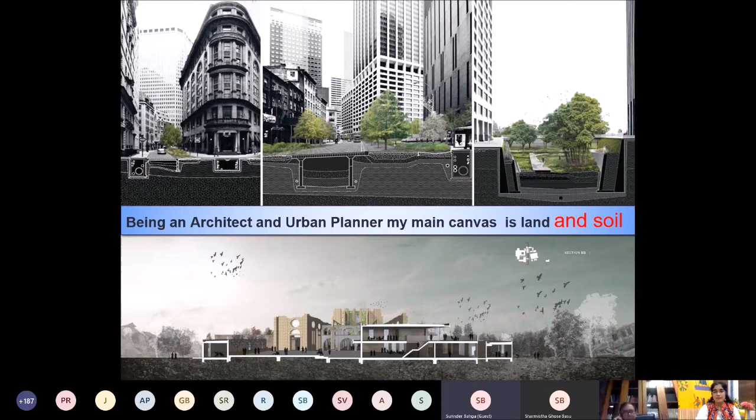But let us go something further from it. As of now, every architect and every owner who has a house on this earth has already affected the starting 10 to 20 meters of the subsurface, that is the ground.

Maybe it is having 2 layers, 3 layers, 4 layers, and there is life below the ground. The water is flowing, there are caterpillars, there are houses of many animals which live below the ground, and your foundations are continuously going below and below.

If you see Burj Khalifa or any other building, the foundations have reached up to a greater depth, affecting the life below. So once you affect the life below, the life above is naturally going to change, because there is a Newton's law.

Every action has a... you can complete the answer in your mind. So we have already affected this 10 to 20 meters of layer throughout the earth, wherever land is available.

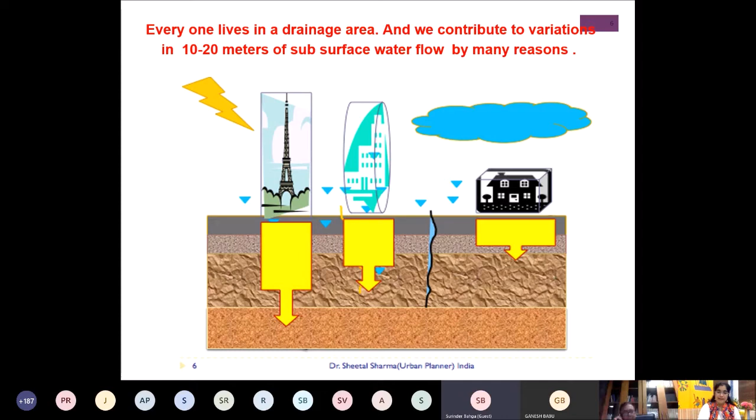There are 4 to 5 types of soil, you must be knowing it. Alluvial soil has a water carrying capacity of 70 to 80%, but under certain circumstances.

I can give you an example: you can be saved from COVID-19 if you have a good immunity system, but a person more than 75 years of age may not survive as much as a 25 year old is expected to survive from COVID-19. Same with alluvial soil, it has 70 to 80% capacity under certain conditions.

Sandstone, if it has a loamy nature, then 80 to 90% - meaning if 100mm of water falls on it, 90% it will save. Same with basalt, 70 to 75%. But sandstone, if it is loamy sand, then it is only 30 to 40%.

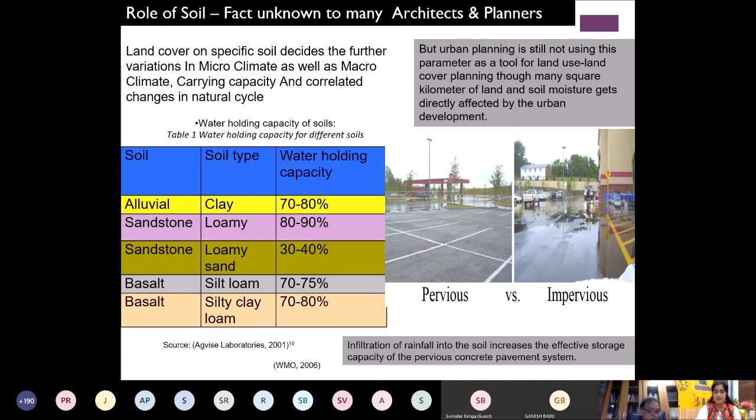So now you know about the land and soil. If you know about it, we can go further.

We will not be discussing any climate change areas because my presentation is very much concerned with the architect and his sites. So we'll not deviate from this part. We'll just see what land and soil are doing.

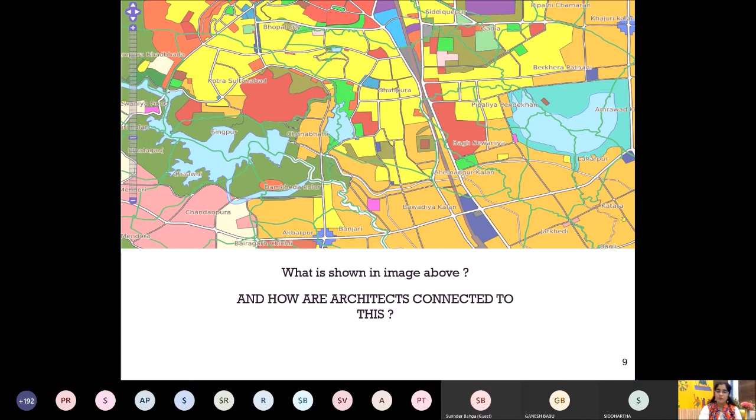And as per the land use, the bylaws will follow along with the land. How much the building can be taken above, how much percentage of green area you have to leave. So these are different colors shown and you have to follow the building bylaws issued by the specific municipal corporation of your area. So if this far is clear, then we'll move on.

So in these urban greening guidelines, the national norms say 12 to 14% of the area should be green in a small town, 18 to 20% in medium towns, and for metropolitan cities, it is 20 to 25%. Now I don't know where they have taken this percentage from, but these percentages are being introduced.

Now, what does the international norm say? The international norm says that there should be unpaved open space, undeveloped, in its very natural state. Desirable is 40 square meters per capita. So you just multiply the Indian population by 40 square meters, and you will get the desirable green space for India. Or the average minimum should be 20 square meters per capita. We can do this calculation very easily. We have 130 crore, I think.

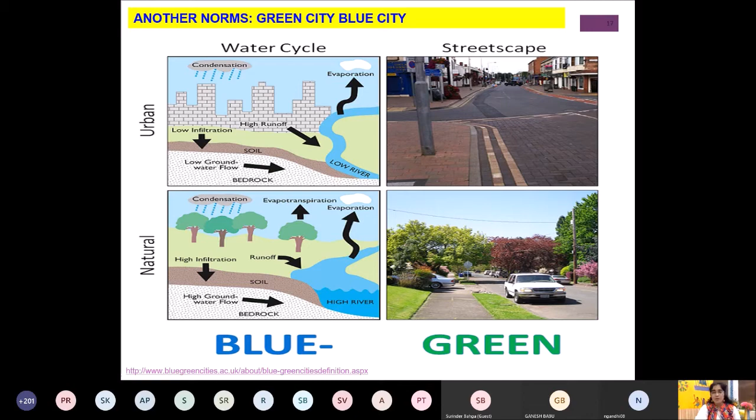Another guideline which is nowadays very famous, in every presentation given by the students in my college, in another college, is the green and the blue architecture, or the green and the blue land use planning. What is this green and blue land use planning? Any ideas? Basically the same thing, that we should go with the nature, we should go with the water cycle, and we should help the water cycle. But how much it is used, let us see.

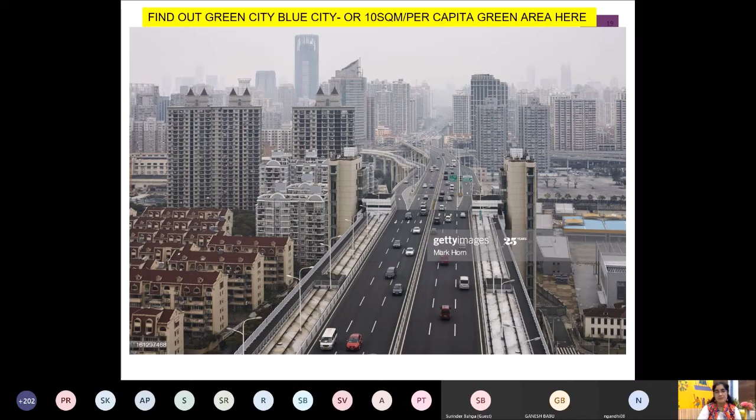Find out the green city or the blue city or 10 square meter per capita in the picture. If anyone sees any single dot, please let me know. Any single dot in the picture above will give you a good round of applause. Anyone? No? So, next. Find out the green city, blue city, or 10 square meter per capita area here. Anyone who can see any one of the two trees near the apartments? No. So these are the cities, very high-tech cities.

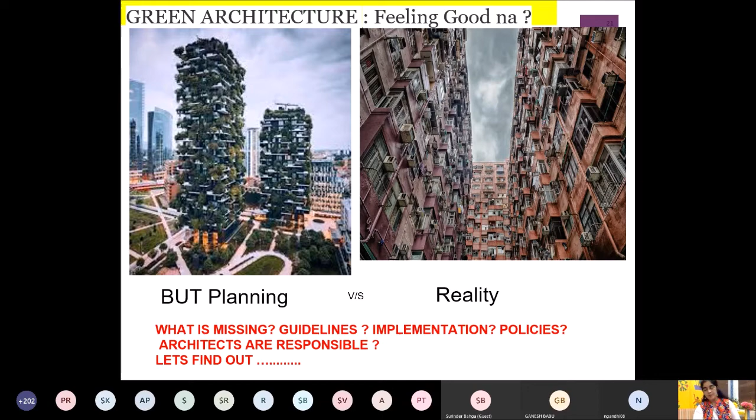We have guidelines to wear the mask. And since last 55 days, you must have seen many people wearing the mask in very different ways. So is the WHO not doing its work properly? Or the Indian government has not given you the guidelines for wearing the mask? Yes, they have given. Then where is the problem? With the public, or with the spread of the knowledge, or with the attitude of the public that let's see what happens, we have taken the immunity booster.

So like this, there are guidelines for each and every act by the architect, by the planner. Guidelines are very good, though they also need some changes. But yes, at present, there are some guidelines which every architect and every planner is supposed to follow. But that is a bitter truth, you can say, between the development and the planning. That is, development is already running faster than the planning.

And where we are missing is that the architects think that it is the job of the planner, it is the job of the development authority. The planner thinks that I have done my job, I have followed the guidelines, and I have done my duty very well. Developer thinks that yes, the plan is approved, I am doing the building construction very well, and I am not responsible for anything. So this way the cap moves from one round to another.

So urbanization. This thinking leads us to some specific goal, that is, for 54% of the population, the built-up area in the world has increased by 145%. That is, our built-up area is 145% more than the required built-up area. And what is the reason behind it? We want separate bedrooms, we want a veranda, we want a jacuzzi, we want a terrace garden, we want everything. And there are slums also which are having only one room to stay for 12 people. This inequality is there, but the ones who can make this facility available, they are using more and more built-up areas.

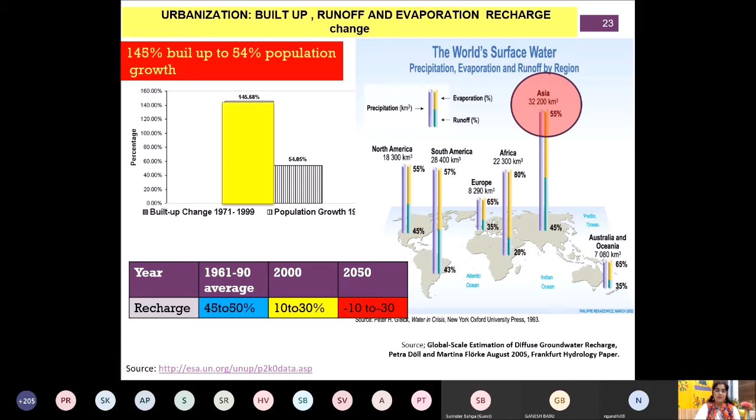How? Now, as I told, there is a guideline for masterplans, there is a guideline for planning, there is a guideline for building bylaws. There is a chapter also for the students on building bylaws, and there is a town planning chapter in the 4th semester. So students, you can clearly correlate these guidelines with your planning and with the things which I am going to show. Now I am shifting to the practical application of these guidelines in my own city, in my own house, in my own colony, because it is a judged one, an experimented one, how these guidelines are being used by us.

First, the guideline is having 700 pages, but I only open this page. If I'm planning a colony, I just open this page. Okay, residential, I have to give 45%. Commercial, I can give this much. Open space, I will just see, oh, open space is only 10%. So I'm happy. I give 10% of the total colony which I am planning as an open space, and I try to reduce it to 9.8 to 9.9% also. Who comes and calculates the whole thing on plan? I will be showing it 10% as you do in the submissions, and the same thing we do in town and country planning also. So I am concerned only about the land use percentage.

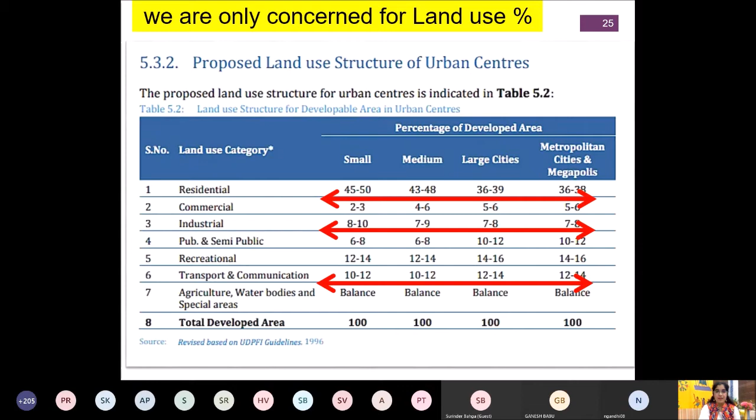Then when I go further, I see the percentage of open spaces to be kept in my colony, in my own house. So that is the last column which is being shown. That is, this much space should be the road. So I reduce the road, I give it to the buildings. I reduce the parks, I give it to the buildings, so that I can earn more and more. So open area is always neglected. Third, I see the setbacks. If my plot size is 40 by 60 feet or 30 by 50 feet, I just see how much setback I have to keep and how much balcony I can project.

So inch by inch, I am crossing the limits somewhere, making the plan as per the municipal norms, but on site, there is a different story going on. Everyone will agree with me on this point, that the plan submitted to the municipal corporation is something different, and the building existing on the site is something different.

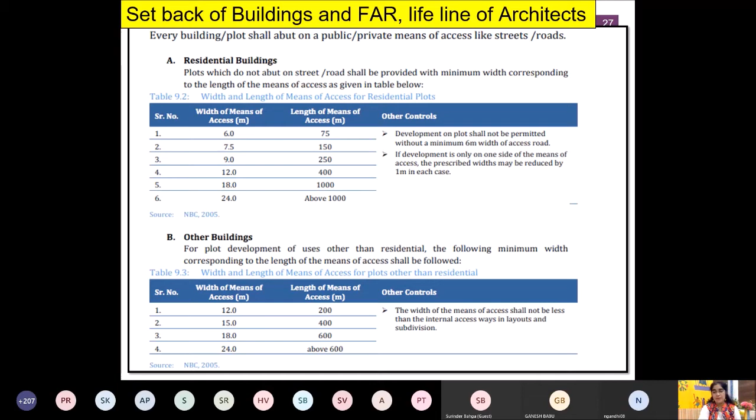Why does it happen? Because the land is costly. You have limited land, and it is costly. You have more expectations, more areas required. India's population is very big. Plus the social norms also, that we should have 5 rooms, 6 rooms, etc. So this takes us to many other things. So the marginal open spaces always excite us to convert them into built-up, whatever the norms may be.

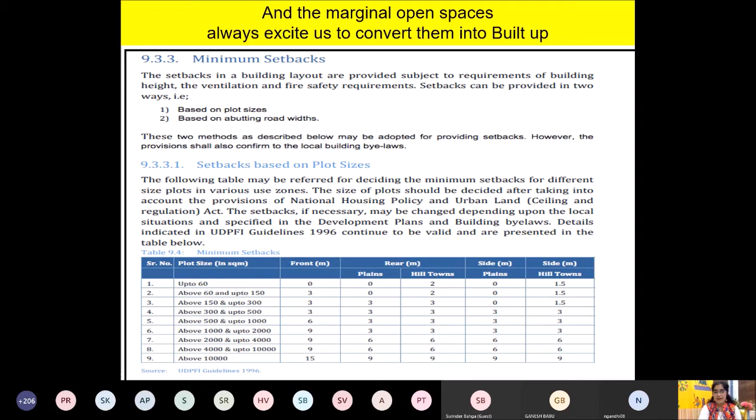Even I can write a garage for my bedroom in my municipal plans, and I will make a bedroom, I will not make a garage. So these are the things which happen. So somewhere I have started violating the guidelines on my own, without the owner's urge or something. I have started tampering with these guidelines and implementing them on the actual site.

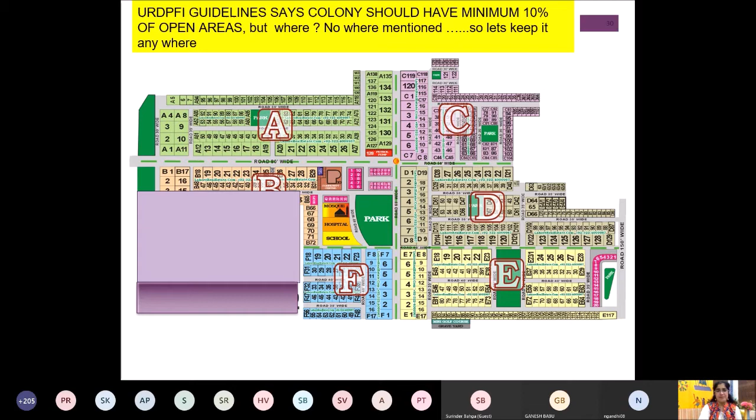What happens? See this colony, 10% is being kept as garden. Just find out where the 10% is, and my rain is falling on these gardens, and where will the rain go? I have taken 10% of the open space here. So technically I am right. Economically I am right. I have all the plots east-west facing, everything is there. Almost every house has some or the other park. It is the best possible planning done by me, or maybe some architect, but the gardens are separated, you can see.

Next, find out the green areas in this colony and find out the number of plots. Don't only concentrate on the green areas, but concentrate on the number of plots. Each plot may have maybe 4 to 5 persons per house. So the household capacity: how many persons will be living in this colony, how many gardens are there, how many open spaces are there. Okay, in plan this is looking very good, but what happens in the actual areas?

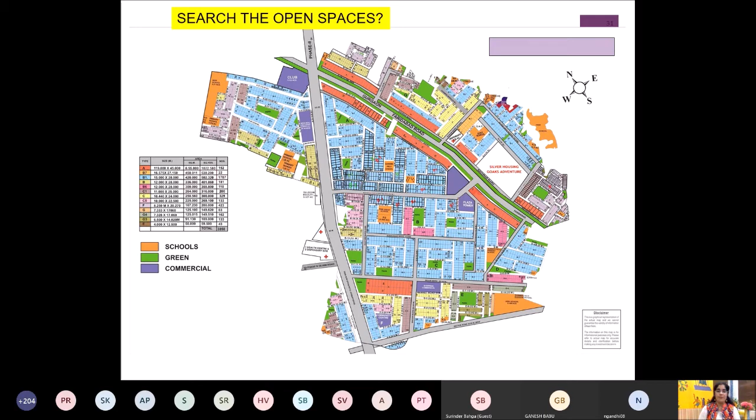Now, there is a natural drainage going through this colony. There is one point in this area where the water is asked to take a 45 degree turn. Is it possible for the running water or the storm water to take a sudden left or right turn? It is not possible, but the planners have managed to do the natural drainage planning as concrete drains or sewers, making the water turn at the angle specified by the planner and not by natural terms. If you have seen rivers, they have a wavy kind of pathway, but here it is all customized and it is all geometrical.

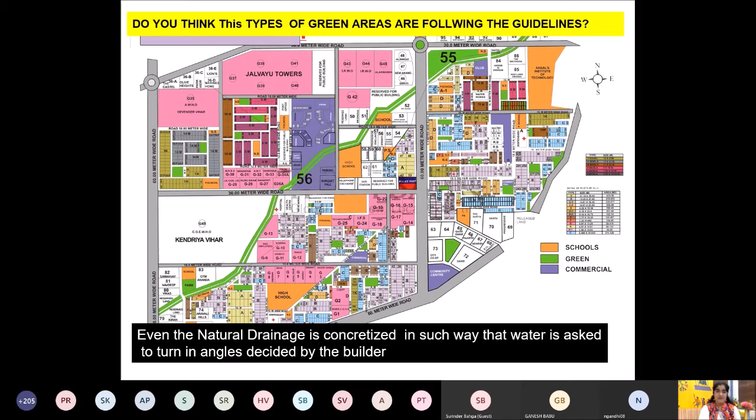So do you think these types of green areas are following the guidelines? The answer is within you. We'll go further and we'll see what happens. So let's take an actual case study for water sensitive planning and what we have done. I have taken my Bhopal city. I have taken some watersheds and some wards in this area. I have studied the guidelines of Bhopal. I have studied the rainfall pattern from 1974 to 2014, that is for the last 40 years. And this way I have taken all the built-up area which is possible as per the guidelines.

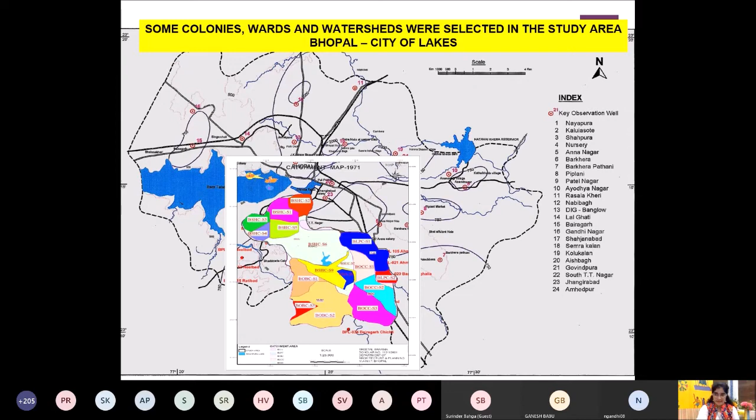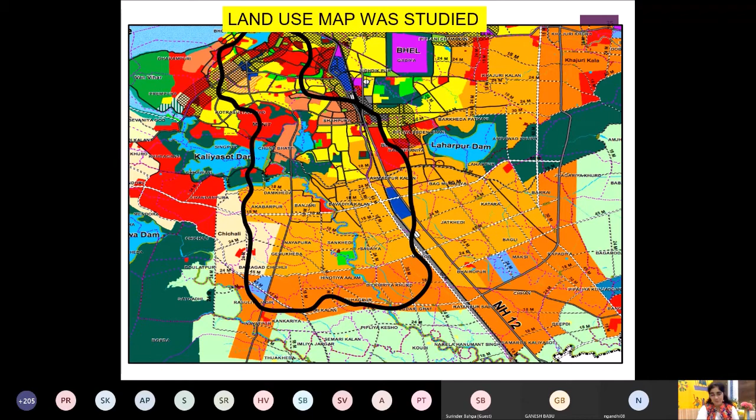So I divided these watersheds into 3 geological parts. The land use map was superimposed. The green areas were marked. The percentage was taken out: how much green area is there, how much residential area is there, how many lakes are coming, because Bhopal is known as the city of lakes. And this way I did the calculation. These are my 3 geological patterns: I have the Deccan basalt, the sandstone, and the alluvial soil.

Till now, there is no study done by the master plans that if some mall or hospital is on some specific soil, what will be the result on the runoff and the recharge. No study is there for these types of things. So though municipal guidelines are being followed, one important aspect being missed is that the immune system is being neglected while giving you the immunity booster. I'm just correlating because this is the latest topic, COVID.

So geology and built-up area, when studied on the actual watersheds, gave me some very interesting results. Being an architect and planner, I was really amazed, and again I did so many calculations and simulations using the Storm Water Management Model approved by the EPA and the National Institute of Hydrology.

I did the simulations for the last 40 years of built-up area of Bhopal: when there was no development, when there was small development, medium development, and sudden development, because suddenly one master plan came and converted the green areas into residential or commercial land use. So suddenly you can find out the changes and what those changes are. So I took these 2 examples.

Figure A1 shows my plot size, 40 by 60, and as per the Bhopal bylaws, the green area should be left as the setback, open to ground and open to sky. Though it is not mentioned anywhere in the guidelines, open means open to ground. But the actual construction is figure A2, which shows that only 5% of my plot is green and everything else is tiled with very nice paved tiles. The built-up area is there, servant room is there, everything is there.

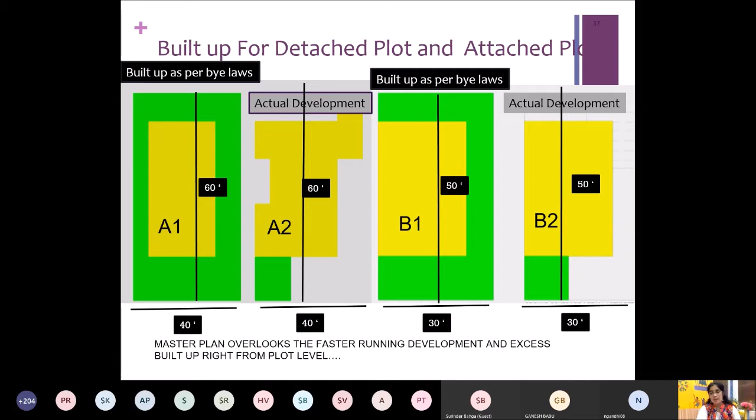Another example is a 30 by 50 plot. Here the Bhopal building bylaw says there should be a 3-side open area, with one wall as the common wall. But the actual built-up area is again 85 to 90% and only 5 to 8% is open area. So what does this mean? This is very good, every owner will be happy, every architect will be happy, but the land and the soil below are crying. What happens when this is done?

So this is my colony. These are 4,000 plots, and if I follow the guidelines, my colony should be as green as shown in the figure. The purple color is the commercial zone. My colony will be this green if I follow the setbacks and keep the open spaces green as shown in the last figure. And this is what my colony looks like now.

This is the actual development of my colony, having 4,000 plots, where the built-up area has crossed 85%. The open space is only 10%, and that is only because of the gardens, and the road is 20%. So I've already exceeded the bylaws, and my plots don't have the open space that was required, and which the municipal corporation thinks they have given as setbacks, so my plot will have 3-side open areas.

You can bring any picture and mail it to me, a house having 4-side open spaces, and I will give you a round of applause in return. But it is very hard to find a house having 4-side open areas, except the 50 by 80 houses constructed by the Housing Board or the BDA. Only those houses, rarely in some old city areas, have so much open space. So what happens with this?

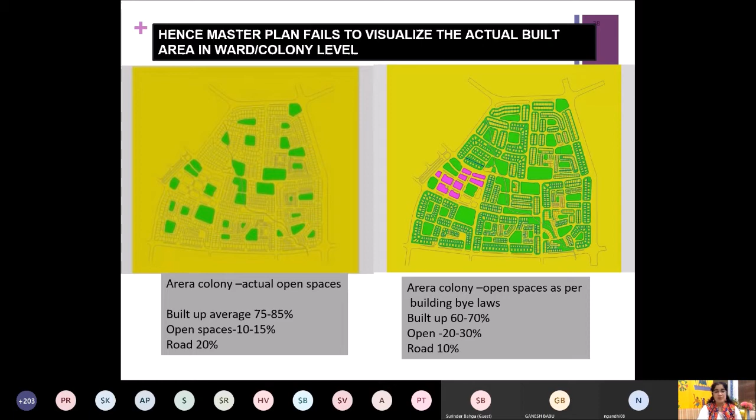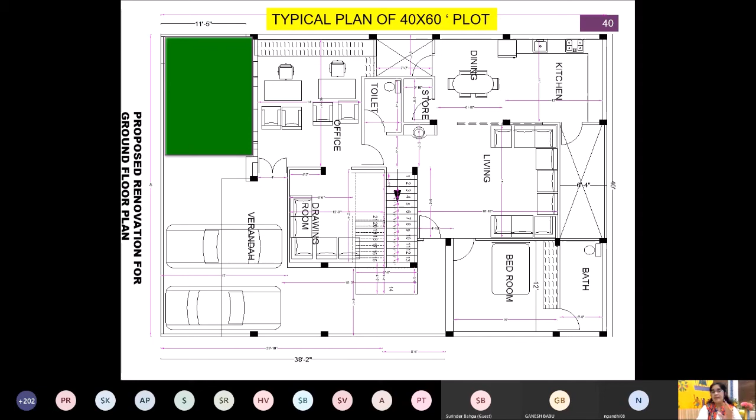In another colony, you can see the difference between the actual development and the guidelines. This is not only about not following the guidelines. This is my house, simple, having a lawn, and I've done the rainwater harvesting. This is a 40 by 60 plot, and this is the basic planning. I have taken the same planning for at least 10 to 12 plots and a road. The road is 12 meters wide.

You can see some houses have green areas, that is the green lawn. Some with boundaries have rainwater harvesting, and the rest of the houses don't have rainwater harvesting. Why am I saying this? Because Bhopal has made rainwater harvesting compulsory in every house, and there should be some well or recharge point in the areas. But see the total area calculation: road, open area, and now runoff.

Every year in the rainfall, 85% of the water in my own colony goes as runoff. Recharge in my colony is 0.6% at present, from 2014 to 2018. Evaporation is 9%, and soil moisture content is only 0.2%. That is, if in the next 2 to 3 years my soil moisture is not taken care of, the layer of my colony will convert into desert.

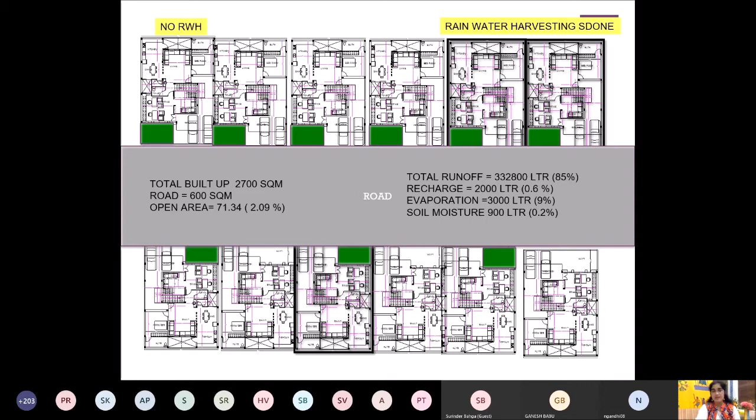This is what is happening at present in the cities, but we are not taking care of it. We are just looking at the marginal open spaces, the height of the building, the elevation of the building, the vented portion of the building, etc.

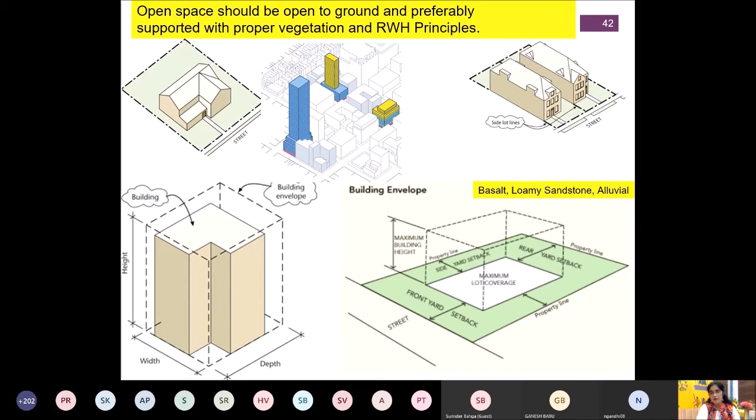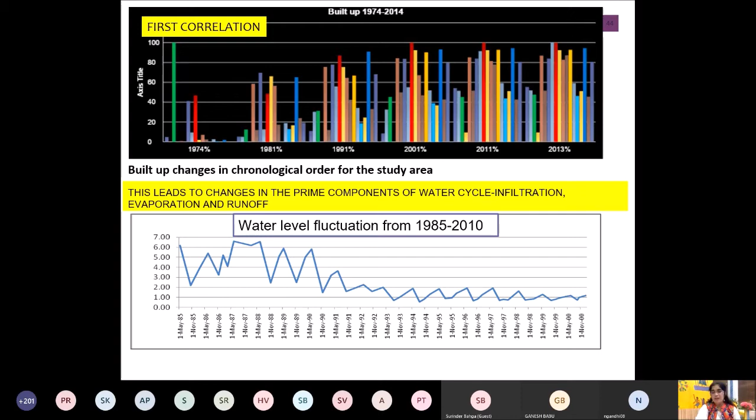Now we can come to the conclusions. First correlation: my built up area from 1974 to 2013, 99% of built up is being constructed. My water level has gone down by 20 meters in 40 years, even though I have 2 lakes around my house, the Shahpura Lake and the Upper Lake.

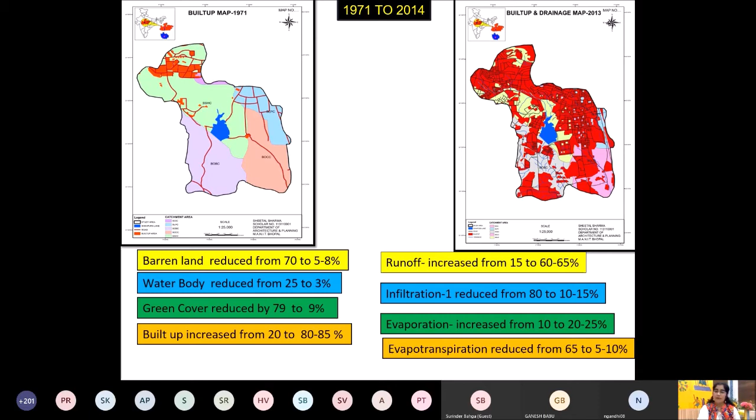So these are the results. Barren land has reduced from 70% to 8%. Water body has reduced to 3%, from 25% earlier. Green area reduced to 9%, and built up area has increased to 85%. What happens with this is that runoff has increased by 65%, and evapotranspiration and infiltration reduced by 80%.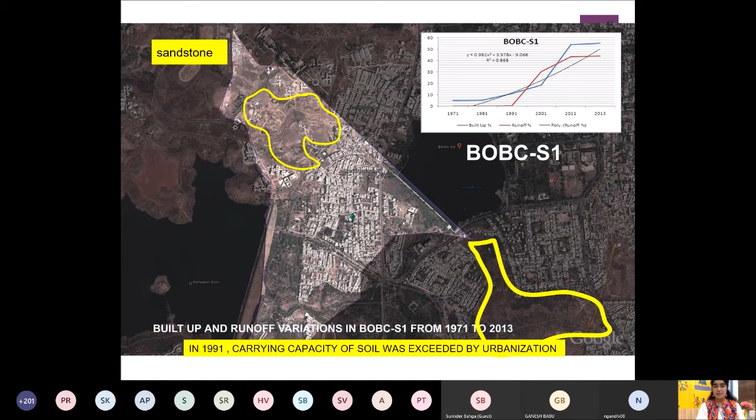The blue shows the built up, and the red shows the runoff. The runoff has suddenly increased from 1991 because the 1991 master plan suddenly changed the land use of these areas, and the geology here is sandstone. So you see, the geology was not taken into consideration. I will show what are the results due to this sandstone and due to this sudden change in the master plan and the built up near my area.

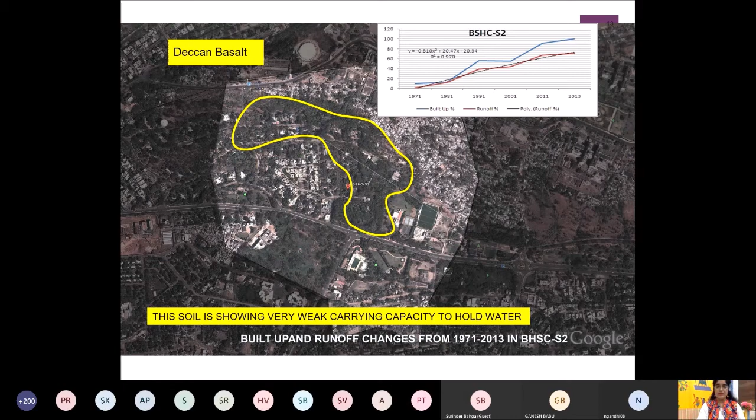Again, we come to the alluvial soil. Here you can see again 1991 was the starting point where the runoff suddenly increased. This soil supported urbanization to a greater extent, but after that it exceeded its carrying capacity, meaning the carrying capacity was over, and finally the runoff was generated.

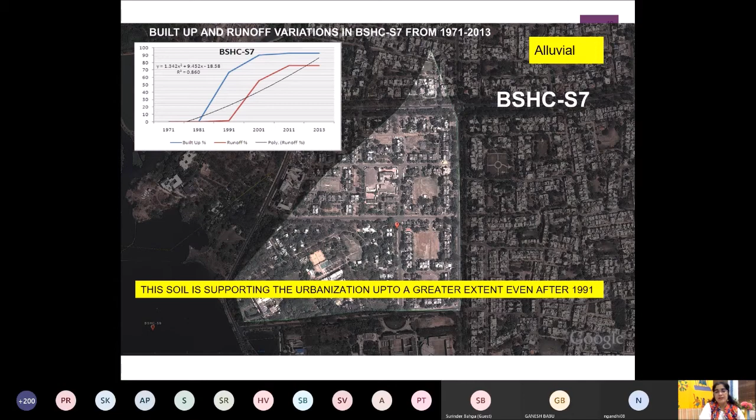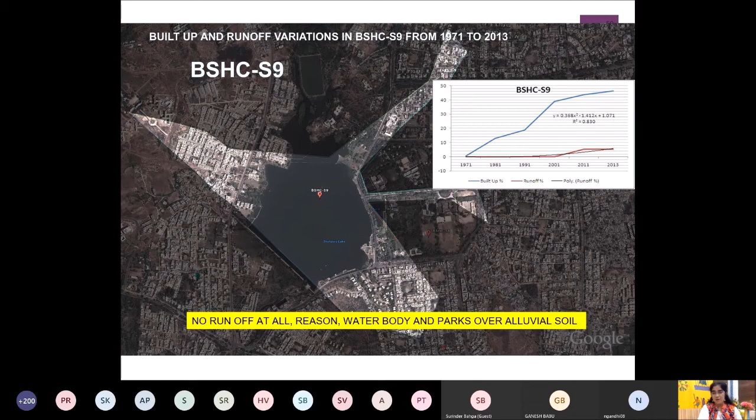Here it is the lake. You see there is no runoff at all, because the area near the lake is generally green. Though the built up has increased, the runoff is very less here because it is alluvial soil, and the rainwater stops for a minimum of 7 to 8 hours on the ground. This is a new term I am using: the rainfall stopped over the ground for 8 to 9 hours, meaning the soil got a lot of time to drink the water. In our own terms, we can say it got time to drink the water.

This is a very important chart which shows that sandstone supported the build-up up to some extent, but Deccan basalt did not at all support the construction. So when I'm having basalt soil in my area, whether I'm an architect or a planner, I can place a cricket ground over it so it gets more chance to remain green. I can make a national park over it, or make another use of this Deccan basalt so that the area becomes more green and supportive. Alluvial soil has very good water holding capacity only when the water is allowed to stay for 8 to 9 hours on this soil.

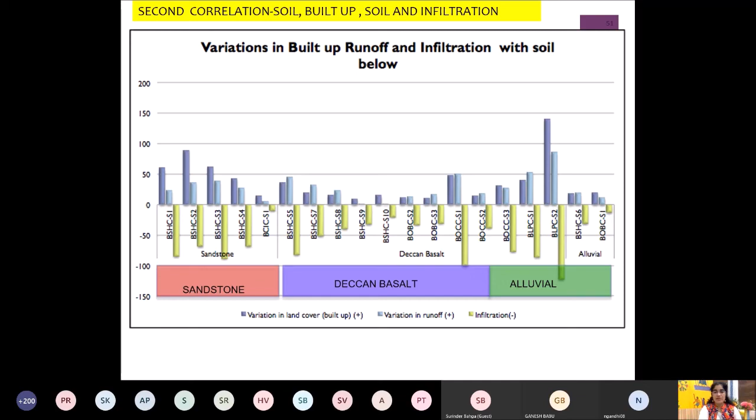This is the duty of the architect and the planner: your building should stop the water near or around the building for at least 7 to 8 hours, which you won't like because it will cause flooding. But if all architects and planners do the basic study of this geology and your building, your colony will have a very good recharge potential, and the soil will help not only the built up but also the recharge. So this way, basalt soil supported construction but generated maximum runoff.

For this, I need small open spaces for catching this water. The runoff and roughness required for this area is 0.4. That means you should plant shrubs and trees over here, not grass.

Another catchment which had alluvial soil needed grass and some shrubs, with a time span of 8 hours so the water can be taken into the ground. Sandstone was somewhat favorable, but urbanization ultimately took the lead and it failed to catch the water for a very long time. That's why it needs some porous land surface, like pebbles, which can make the water go inside quickly rather than running on the floor.

So these are the things. Increase in built up area is more than 60% than the approved limits. If your Nagar Nigam says there are 4,000 population in the area and the built up is 2700 square kilometers, suppose, it will always be 60% more. You can check your own house and calculate. In your approved drawings the built up area is something, and your actual area is something different. So development has already taken the lead, and 60% of built up already exceeds the approved limits.

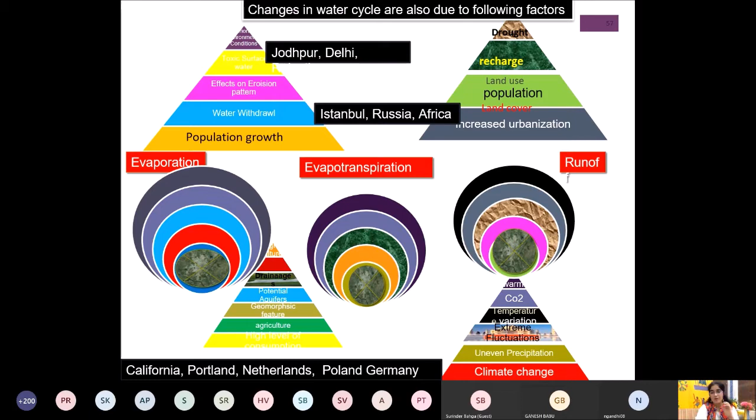That's why the runoff is exceeding by 75%. Recharge has reduced by 45%, and urbanization is 25% faster than the planning. So master plans take many years, and till then the area is developed and we can do nothing. But every area will have a different rate of variation, rate of runoff. A detailed study of the specific area is needed, along with population, climate change, water withdrawal, etc. I will not go into detail on this.

So I just took these results of soil, water, land, and took the master plan of my Bhopal city. I did some model studies on how this can be used by an architect and the planner. 40 to 50% of runoff I could save. What I did is I took 20% of my horizontal surface, my old horizontal line, and 10% of my vertical surface, and converted it to the rainwater harvesting system only by planting grass and trees. No mechanical thing used. So what happened?

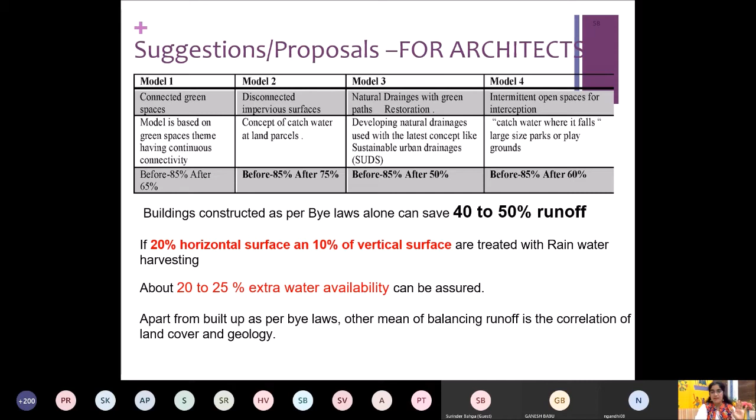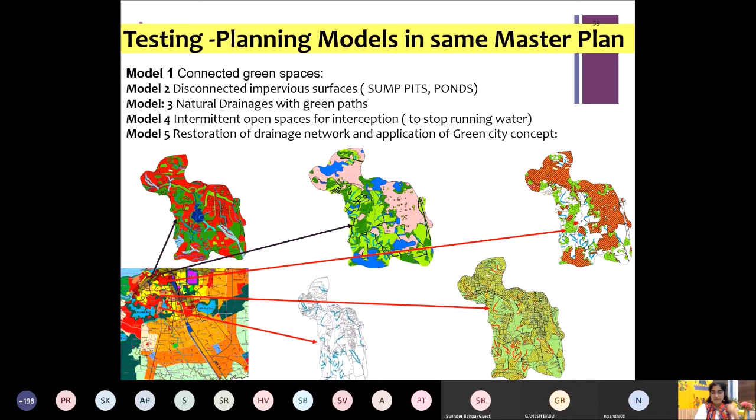These are the models. I used the same land use plan, the same guidelines, the green guidelines, the guidelines for stormwater drainages given by municipal guidelines, the connected green spaces, as much as I could do through green areas, corridors, near the roads, near the transportation lines. And I did 5 models for the same land use of Bhopal.

My first model had a connected green path from my colony to another colony and from there to the lake. I reduced the runoff to 65%. The second model, disconnected areas for the sandstone where the water was flowing, I gave an open space like a cricket field, and the water stopped there. This way I reduced the runoff, resulting runoff was 75%.

Natural drainages in my area were allowed with a green path. I reduced the runoff. Actual runoff was 85%, and the resulting runoff by this was 50%.

Model 4 is intermittent open spaces. In old words we called it a khanti, or maybe a small pond. A man-made pond is made everywhere near the locality, or after every 3 to 4 wards, so that the running water is caught at that place and made to settle down.

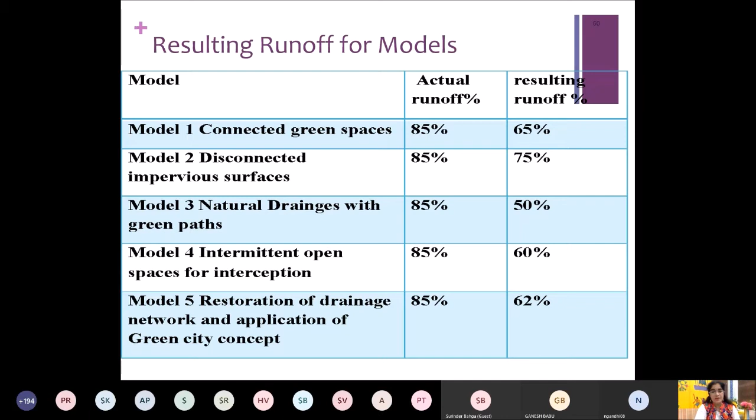Model 5 was the restoration of the drainage. Many drainages which I showed in the colony map were concretized, but I made them natural again with pebbles, like the sustainable stormwater drainage which Seattle, Washington, and Australia are using. I used these models and reduced the runoff by 35 to 40%.

Then I introduced basalt, sandstone, and alluvial soil in my colony and zonal planning as a new table, with the percentage of open space needed: 25%, 35%, 30%, matching the guidelines given by national norms. I followed the same guidelines, but proposed that basalt soil should have 15% recharge pit with a semi-porous material, whether small grass, shrub, or tree. Moderate porous for sandstone, because it has a sandy nature so it catches water very fast. And alluvial having green vegetation and grass, but a time lag of 8 hours. So these I have done.

How much built up can be supported? Here I have taken a new turn that if I am having basalt, it can support 50% built up area without affecting the carrying capacity. But after that, we need some additional support, like a ventilator or an oxygen mask for a COVID patient. So this way I can correlate that this soil can work without any support up to this percentage, maybe nearby this. But after this, you have to give some support to your land and your colony for getting the maximum results of water sensitivity in your area.

If you know about the streams passing by, if you're having bores in your area, if you know that this bore is having water at 40 feet and that bore is having water at 150 feet, you can have your own discussion in the colony, or being architects, you can have a forum where you discuss the water levels of different areas, and come out with some basic landscaping - not a very designed one, but basic - and the soil knowledge can save much water without interruption from the government or the green guidelines.

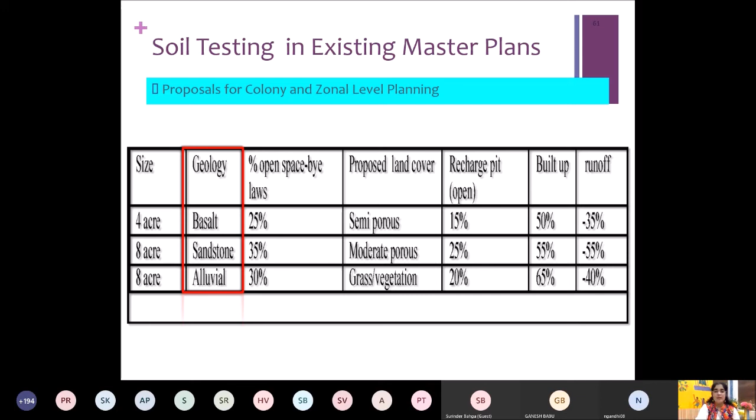Secondly, if architects ask what is the use of doing all these things - this is the proposal which I've already given to the Town and Country Planning Department. Nowadays you use transferable development rights, TDR, for which you get extra built up area, and everyone is happy to get extra built up area. So if I give you extra built up area in return for an open space, which is a recharge pit, I have named it the transferable recharge rights, TRR. This is what I am proposing - give me my open space, like the slogan given by Subhash Chandra Bose, you give me blood and I will give you freedom.

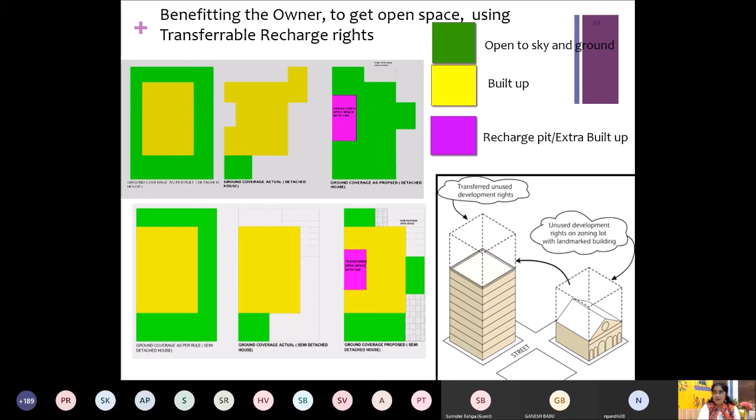So this way I can give you water in return if you give me a quarter part of your plot, and I can give you extra built up space. If you agree, new norms can bring this change, that this area will be open to ground. It will be a rainwater harvesting system working efficiently, and you will get allowances for this, maybe some subsidies. This is the thing which can be proposed and is already under consideration. If this happens, out of 100 people, I think 25 to 30 will seriously follow this - the rest, I'm not sure.

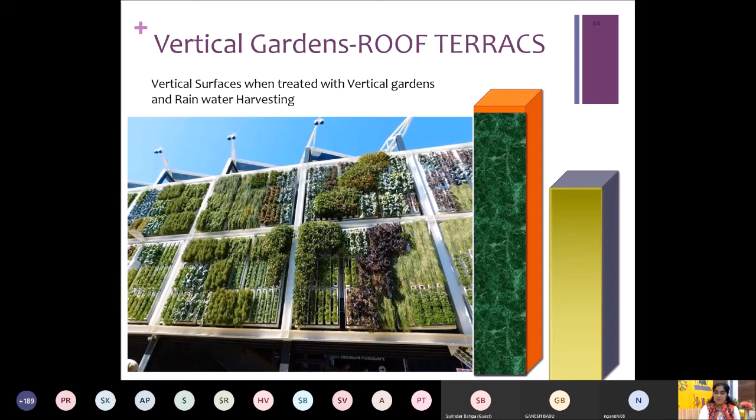Then we come to the vertical gardens - these are the last part. Nowadays every country is using vertical gardens. The city tree is famous in Edinburgh, I have seen it. It reduces the pollution and the runoff. So the vertical surfaces, when treated with green, I think your elevation will be natural, and you won't be spending much money on it.

So why are these vertical gardens so much in demand nowadays? First of all, they keep your building cool. India needs it - instead of glass, if we use this, I think it will be more beneficial. Yes, maintenance will be a part, but we can tackle with it, no problem.

So I took my vertical built up area for my colony, and I found that my vertical built up area was 270% more than my horizontal area. This was a super bumper lottery for me, that instead of having 24 or 30 acres of land, I was having at least 55 acres of vertical surfaces which I can use. This is a very good thing which I got from my calculations - that 270% of the built up area was available to me, turn it into green.

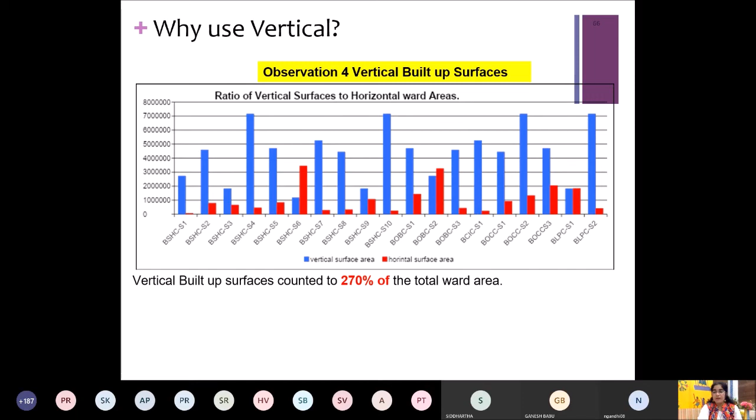But practically it is not possible. So I just took 10% of it. Only 10% of my building surfaces, that is the vertical surfaces, and I use the green garden on this 10% of this 270%, and 20% of the horizontal area which I have shown in the roads, near the roads and into my colony with the recharge pits. So what I get is my 10% of vertical surfaces reduced my runoff by 70% and increased my recharge by 60 to 65%. Just by making one wall of my house green, I get this result.

So here an architect is pretty sure that he can use these things, natural things. Owner will also agree, and the students will not have to do the elevation work in AutoCAD. You can simply put the green things and vertical gardens, and the horizontal areas as much as you can keep green with the proper land cover.

But these are the results, and finally the conclusion says that yes, even if you are having a small house construction, kindly do the environmental impact assessment for your small house also, how much area you are taking from the earth and what are you giving it in return. So when you are buying something, you should give something in return. The subsurface demands some concern. So just take the environmental impact assessment into consideration.